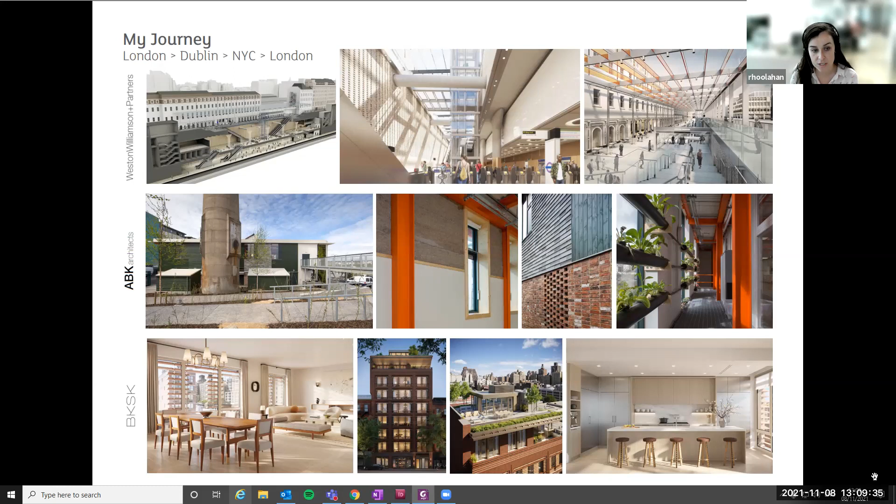And after my master's, I worked with ABK on this beautiful little project out in Ballymun, amongst others, but this one really made a lasting impression on me and looked at really how we can use buildings as an exemplar for sustainability. And with that experience, I moved to New York for a year there working with BKSK Architects. So I was primarily working on a luxury residential scheme, which the images are along the bottom, but actually it was trying to pursue passive house certification, which at the time was incredibly challenging with the luxury resi marketplace.

So why am I here today? Well, as a practice, our sustainability manifesto is that we believe good design is inherently sustainable and should influence every decision in the design process at every level and scale, because successful sustainability is a sum of all parts. What that really means in practice is we are questioning it at every stage of the process.

We haven't always been this rigorous. In 2018, we probably were about the same as everybody else, doing our best, but not doing anything particularly innovative. Our thinking started to change in the early parts of 2019, particularly when Architects Declare came out. And we started thinking long and hard about the work we've been doing, and we felt like we've been doing the right thing, but we're primarily relying on our instinct, reuse as much as we can, wherever we can. And we wanted to start putting data to back up that.

So we started looking at carrying out whole life carbon assessments to understand the carbon impacts of our buildings in-house, and the work has really accelerated from there. And actually, from our research side, 2020 was an incredibly positive year because work slowed down. Instead of using the furlough scheme, the company was in the fortunate position of being able to invest in internal research, and I led our sustainability pieces that are now carrying forward.

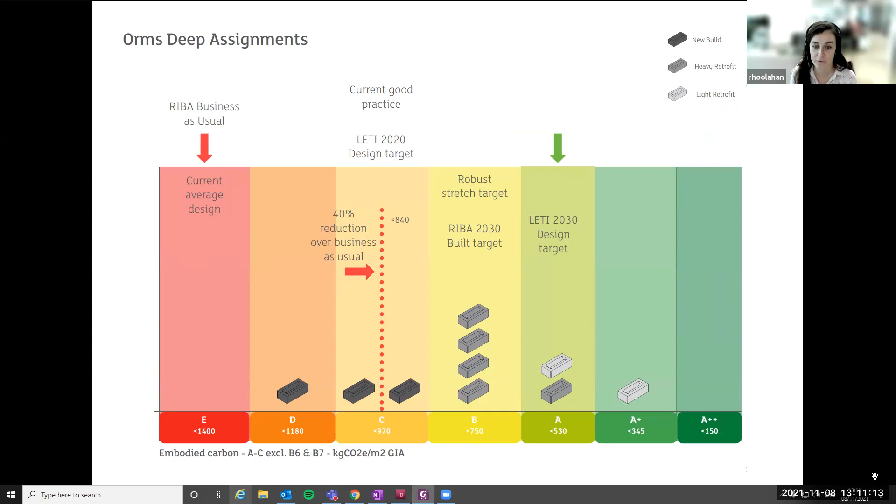So we do a lot of deep assignments. So we look in depth at the data surrounding our projects now. And some of you might recognize this as LETI, a research group over here, looking at how we rate buildings in terms of embodied carbon impact. So a lot of our projects, although they were completed by 2020, were already meeting the best practice targets. And we're taking some of that knowledge and trying to share it across the industry.

So the practice is supporting the UK Green Building Council's circular economy programme this year. And one of those pieces of work is looking at how we can reduce whole life carbon impact by incorporating circular economy. And I'm on the task group for that. So when the report comes out at the end of the year, I will share it. But the main piece of research I would like to share with you is about material passports.

So last year we worked with one of our clients on a design project. The client is the Grosvenor estate. Over here, the royal family hold a lot of estates, as do some of the historic lords, and Grosvenor estate is one of those. So they own huge swaths of city and the UK. Grosvenor have a huge portfolio. They basically own the majority of Mayfair in central London.

And they're very unique clients to work for because they really believe they're custodians. So they need to take care of this property for future generations. And it's a really interesting mindset to be coming at this with. So when we were doing our design project, although they had a very robust sustainability framework in place, they were very keen to understand what more can we do. And this question led to a separate piece of research being set up for 5 months. And we looked at how we could accelerate material reuse.

So our project was looking at 5 buildings in central London and what could we do better? And we thought we should be reusing materials. So this was one of 4 work streams, and I am going to go really quickly through this, but essentially, we believe that the circular economy is a necessity and not a choice. And what we were aiming to do with this work was increase material reuse within existing buildings.

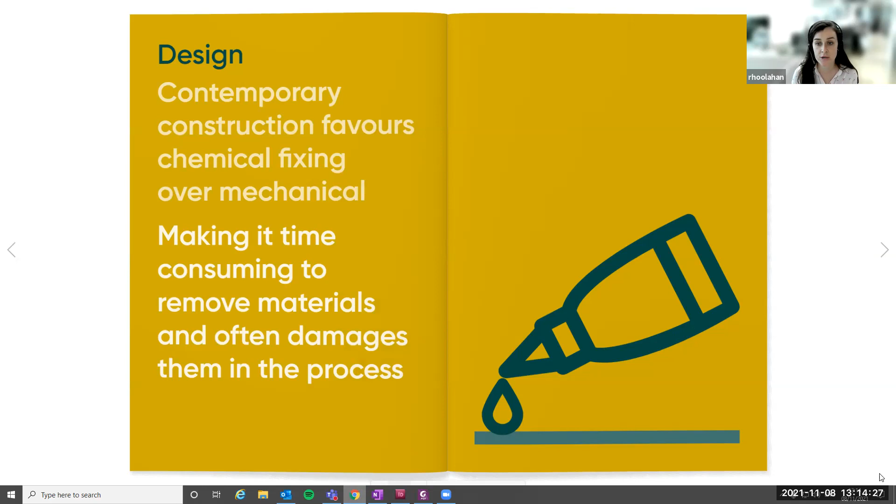So sounds like a great idea. Why are we not doing it yet? Well, the first thing is the cost of it. So it's typically cheaper to demolish and buy new rather than deconstruct and refurbish. We've also, for the past probably 50 years, been favouring chemical fixing over mechanical fixing. So when we're putting materials into buildings, we're gluing them together. So it makes them very time consuming to remove the materials, but also it damages them in the process, so they're not reusable. And then the last and probably the biggest barrier is risk.

So there's a lack of knowledge about the material that's already in the existing building, and therefore we have a lack of confidence in it. So how can we trust that the material is going to perform as we need it to? This is where material passports come in. So the idea of waste being a material without an identity is really, really important to grasp for the purpose of material passports. So the aim of the passport is it gives the material an identity, and then that knowledge about the material can give us confidence in it and enable the successful reuse.

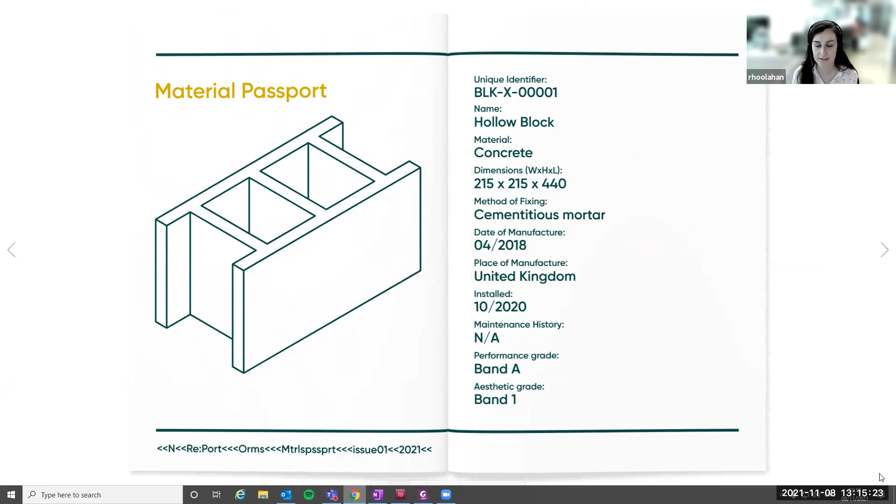So like my passport contains key information about me and where I've been, so does a material passport, largely around the condition and the original specification of the material. So this is our vision. So if you have a concrete block, you might have some key info. So the first one is having a unique identifier, so you're able to find it again. And then you're trying to capture some information that you may know from the original manufacturer, or you might be able to take a guess at.

And we looked at ways of doing this. There was research in place for new buildings. There was research in place that relied on manufacturers to produce the data, therefore, again, aiming at new materials. But what we were trying to do was deal with existing buildings and unlock existing materials. So what we've done is build a materials database for a project. And the idea is that you take your existing building to be redeveloped, you view it as a materials bank today, you have to go through a material identification process.

So these could be surveys. So at each stage of the deconstruction process, you might be surveying materials, you might take some away for testing, and you're capturing all of that data in the materials database. And over time, this will grow and grow. And the user interface is the material passport, and I'll show you what I mean by that in a bit. So I have a couple of references into other research pieces that have been carried out that are really good. And this page is just explaining how, at the start you might not know a whole lot, but if you can link it into your design process, into your 3D models, which we use all the time, then maybe over time the material database can grow as this project evolves.

And we have provided some ways for people to implement this. So this was meant to be an open source piece. It was meant to help the industry. So we tried to keep it as flexible and accessible as possible to all teams of all scales and sizes. And we have produced a number of tools to help people get started. So project teams contact me and I come in and give a presentation to them and help them get this started. And the idea is that as an industry, we can develop this thinking a little bit more, because as a practice, we don't have all the skill sets we would need.

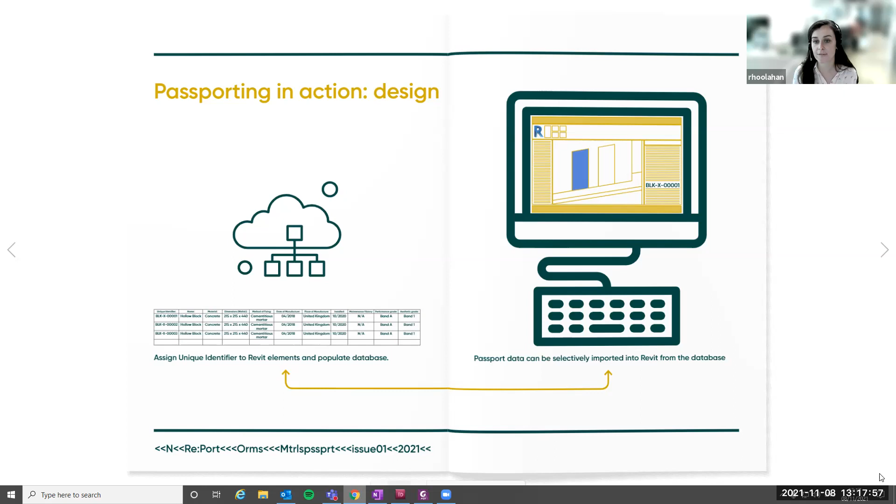And how I use it during the design process is, if I'm putting in a door, for example, I'm putting in my approximate opening size, and I'm looking to my database to see if I would have any doors that would suit that. And if I do, I can tag it, and then the information gets transferred across to that door. So that's the thinking behind it.

And then when the building is built, you will be able to access that information again. So if you went up to a door, you went up to a block, you could scan a QR code using your phone, and it will display the information contained within the material.

And we've also identified loads of problems and loads of future opportunities that we're presenting out and saying, look, if anyone has any experience in this, we'd love to take a look at this. And it sort of plays on some of the challenges around the softwares that we use. So I hope maybe in the years to come, you might come across this work again and hopefully be able to develop it in some way.

And hand over to Aisling, I think. I'll jump back in. Okay, perfect. Yeah, Rachel, that was great. Thank you. 15 minutes, bang on. On the button. Well drilled. Oh, yeah, round of applause from Gary. Thanks, Gary. Yeah, so Rachel, there's a lot there, and I certainly have questions. I'm sure other people will as well.

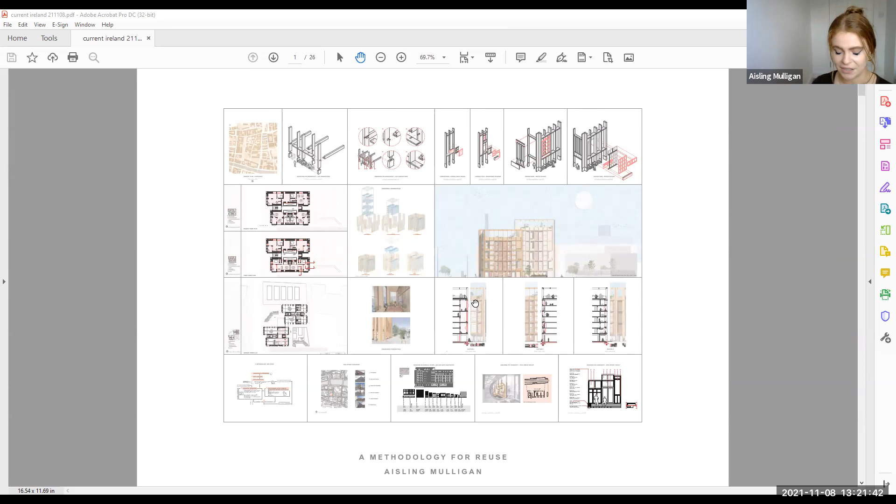So that was what I was thinking of, the discrepancies between having a very carbon heavy concrete building and that being deemed as net zero, as opposed to having a building that is low in embodied energy and being maybe fully net zero. So I started looking at different ways of building in a sustainable manner, using very low embodied energy materials or materials which have negative embodied carbon associated with their manufacture and use.

So I had a whole remit of different materials. And I started looking at how they compare with conventional methods of construction: concrete block, concrete, prefabricated concrete, all of those sorts of methodologies. So these are just two examples of different ends of the scale.

So one thing that was being talked about quite a bit at the time was mycelium, which is a substrate of the mushroom plant, and how that can be used to bind other substrates together, so woody substrates, to create different methods of construction. So that was just one out-there idea.

And then also dowel laminated timber, which became a key starting point to my ideas of sustainable design. Dowel laminated timber essentially takes the idea of mass timber construction further. It uses that idea that Rachel was talking about, where you're not using adhesives or glues to bind the timber together. Usually if you're using cross-lam, the different elements of timber are glued together. But in dowel laminated timber, you use hardwood dowels inside softwood, and they react together and are basically friction fit together, and they work really well.

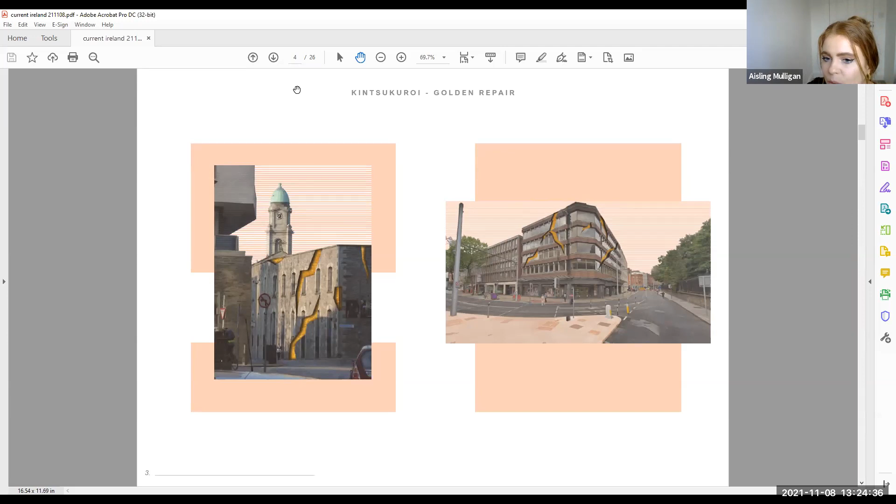So I wanted to think of an idea whereby this could start with the architect, and the architect could bring these ideas of using low embodied energy materials throughout their design process to create a building that could be thought of as net zero from the ground up. There's this idea in Japanese culture of golden repair. We have all of these elements in our cities, buildings as material banks, essentially. And if we decide to demolish these buildings, we're getting rid of all of these resources, whereas we could just supplement them with something new and those resources could be used again. So I started thinking of how you could bring this into a cyclical design process, starting with the architect.

So say you have a building that's going to be demolished. This building would be demolished hopefully in a manner where the elements are harvested, and those elements would be added into a local or regional inventory of materials. This would be the starting point for architects in their design process. If you're Dublin based, it could be a Leinster inventory of materials, something regional enough that transportation wouldn't contribute too much to the associated carbon. You would go to this inventory and choose the elements you could use within your design, and then those elements could be supplemented with low embodied energy materials.

So for the structure, harping back to dowel laminated timber or mass timber. And then hopefully you would design for disassembly, for adaptability and flexibility, to make sure the life of the building was as long as possible. But at the end of that building's useful life, it could be disassembled easily so that the process could start again. Those materials would be reintroduced into the inventory and architects could go on from there.

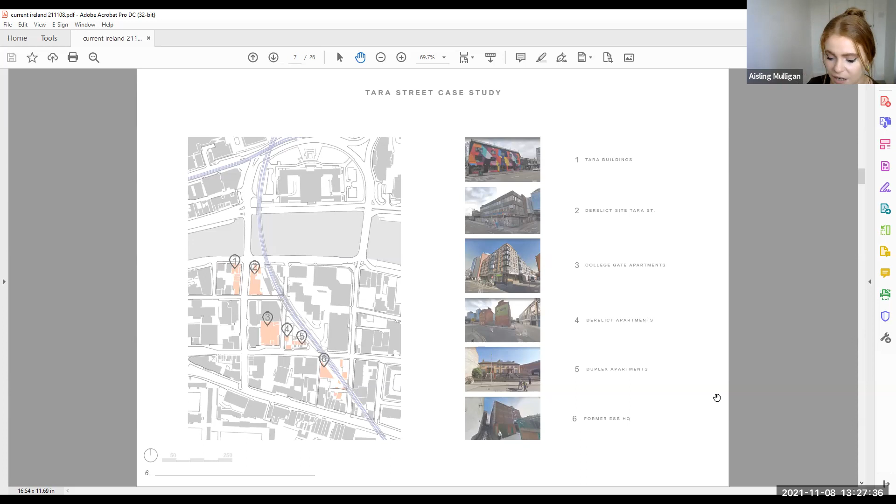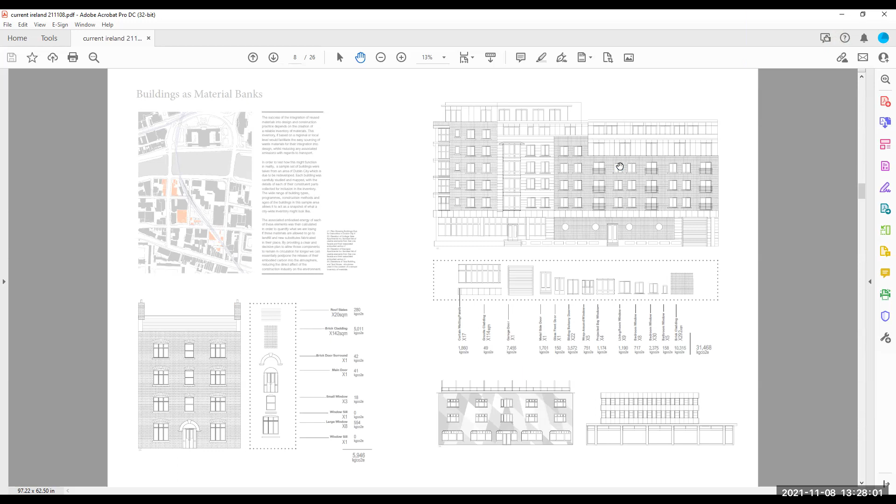So I zoned in on a specific area of Dublin, around Tara Street, where one of the main Metro North stations is going to be developed. At the time, there was quite a lot in the press and documentation about these buildings and how much demolition is going to occur in this area and what we're going to lose. It was quite a good variety of different types of construction and buildings from different eras. So I started to think of what is available to us in those buildings that we could reuse if they were to be demolished in a certain fashion. I started breaking down the buildings by their facade elements and calculating the associated embodied energy with each of those elements to see what we would lose.

And that was then broken down and categorized. So I ended up with this inventory of materials, so I had one of these elements for each building, and it's just a visual representation of what we're going to lose if these buildings are demolished in the usual fashion. And it's shocking to see everything that will go to waste, even down to doors and timber elements and windows, things that could easily be reused, and in some of the cases were very new to begin with.

So I started questioning how we're dealing with those things at the moment and how the council is thinking about demolition. And at the time in the development plan, one of the main things that was being talked about was that buildings over a certain size had to have a material resource and management plan. But I noticed a discrepancy between this being the hopes for what could happen and actually the implementation of that in the city.

So I wanted to then continue on from the creation of this methodology to the creation of a sample inventory of materials, to then seeing how this could be implemented in design. So I wanted to design a building in as circular a way as possible using those elements. So I broke down what I'd been doing thus far into a manifesto of what I wanted to continue with. This came down to the reuse of materials and their supplementation with low embodied energy elements, and then designing for disassembly, so the layering of structural elements, which I'll get into a bit later on, and then designing for adaptability, flexibility, and using demountable elements.

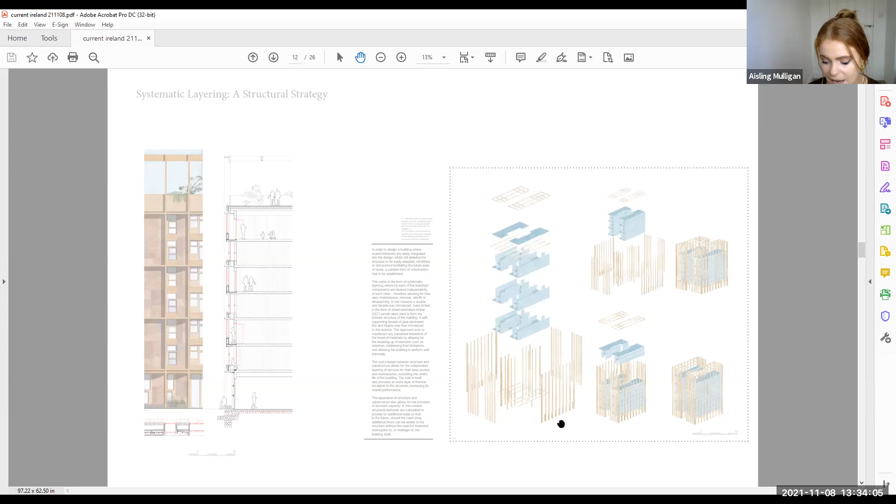So internally, the structure began to develop in a way that you end up with this duplicated external fabric, and the build-up changes depending on the orientation of that facade, so that it can deal with different levels of privacy, different levels of light and stuff like that. But it also means that all of the structure is pushed to the external perimeters of the layout, which means that internally the layout is very flexible.

So just for example, these structures kind of started out as duplex units. So if we were just to take this corner here, this would be the ground floor of a 2-bed duplex. And internally, all of the partitions are non-structural. So these can be moved around as the inhabitants see fit.

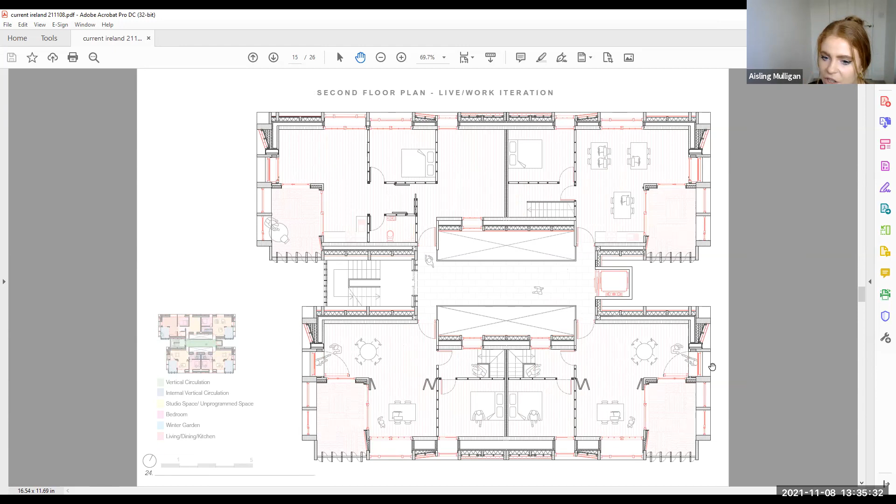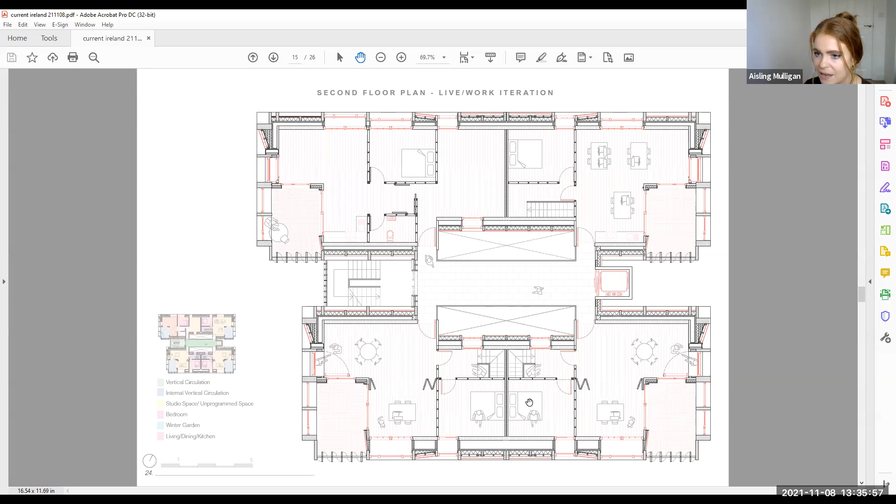But the main idea of adaptability in this was that each unit was designed as per the residential guidelines of the time, but also that each unit was given additional unprogrammed space, which could be used by the residents as a home office environment, but could also be changed to be used in whatever way they see fit. So it could be a granny flat, or it could be extra living space, an extra bedroom. It could be partitioned off from the main living area and sublet as well. So that was the idea of flexibility in the short term.

And then moving on, as you were saying about designing for disassembly and using non-chemical fixings. So I was thinking about how you would be able to design in a manner that mass timber elements could be fitted together in a way that meant that they could be easily reversible, and all of those elements could be taken down when the time came for the building to be demolished. So this was an idea of how that glulam structure might work, with the idea of trying to remove as much concrete out of the construction as possible.

So this was an idea of using stone footings for all of these mass timber elements rather than using concrete, and that these were then, as a visual representation of what was going on in the building, connected by gabions, which were then filled with demolition waste as a visual nod to the public of how the building might be constructed.

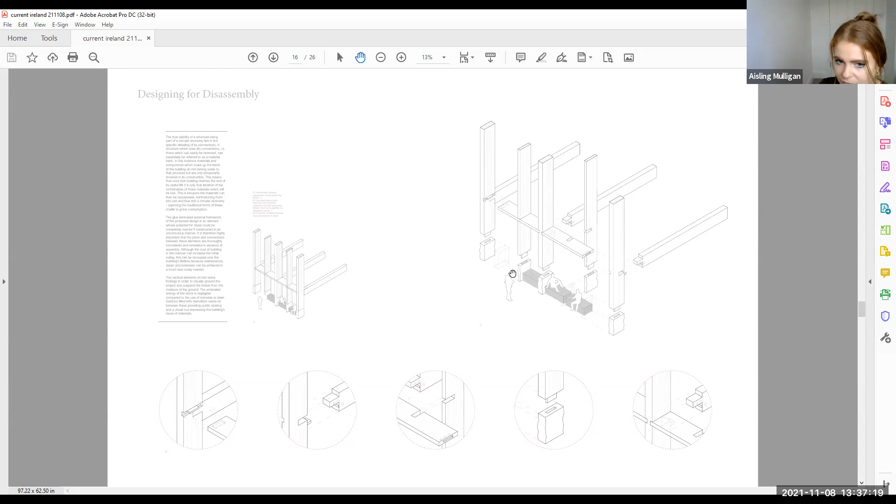So one of the main elements then that needed to be rectified was this idea of how do you incorporate reused elements into a structure whose fabric is newly manufactured. So how do you bring in glazing elements and attach those in a demountable way to a new structure?

So these are ideas of reusing brick panels that were cut from those other structures from the inventory of materials. So instead of trying to take out the bricks themselves and reuse those, the brick facade would be cut into meter by meter panels, and it would then be fixed to this timber cassette framework and then dowelled back to the external facade.

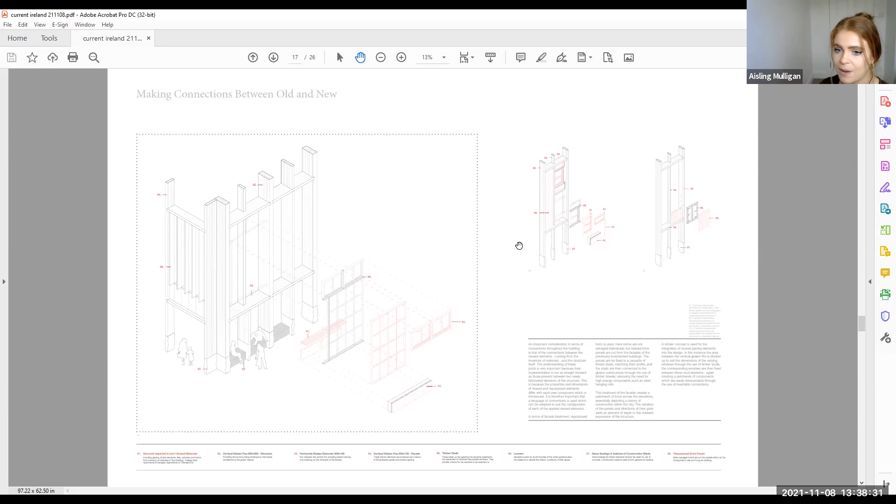And the same would occur when glazing needed to be incorporated. So between the structure, this would be broken down depending on the specific dimensions of the glazing elements that were being used, and they could be fixed in then as construction continued.

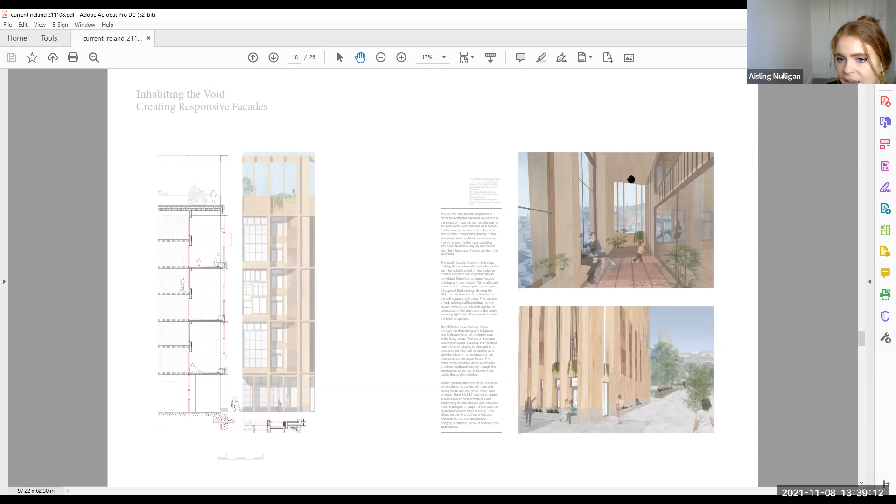So this is just this idea of inhabiting that void between the primary structure and the self-supporting facade, and how this could add to the space and deal with things in different ways. So in the normal construction, this fabric here would be as close to the external facade as possible, but in places this pulls back and creates a winter garden, and this changes depending on the orientation.

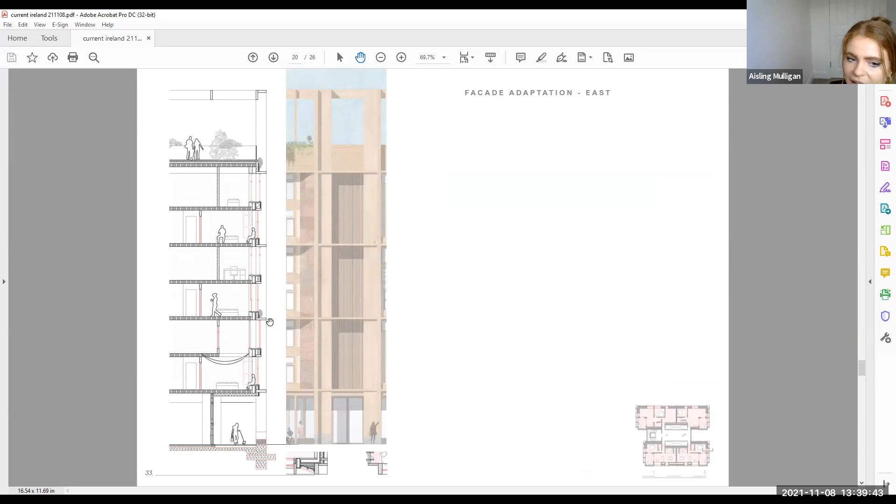So to the south you might have a Juliet balcony or a window seat, and stuff like that. To the east, this becomes narrower because you want the morning light into your bedrooms and into your workspaces. And this is a more private thoroughfare. So the horizontal elements create a visual barrier then as well, and then creating a winter garden.

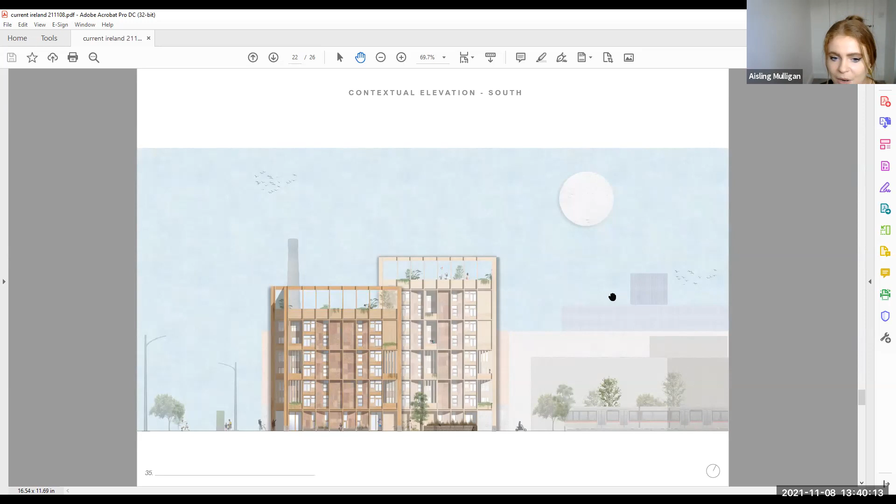So just to finish up, I wanted to look at one of the main things, I think, in the public realm anyway, which is what would this idea of reuse look like? And would it be terrible, basically? So I was thinking of how you end up with this patchwork of materials and how it might actually look nice. So those were a few things.

But then the main kind of element was the idea of cost. And I did a lot of research into that and how maybe at the beginning of this process, the costs might be slightly higher. But if you think about the maintenance of a building whose elements are very intertwined and difficult to take apart from each other, those costs cumulatively over the life of the building become very high. And this is kind of rectified by dealing with this at the start. So you end up with much lower costs.

And then just the last thing, the building that I designed, I went through and did a whole carbon analysis of how much embodied energy would be associated with it, and then at the same time did a concrete equivalent. So if I was to design that building in a normal manner, how we usually build at the moment, what that would be like in terms of its embodied energy and just the different elements and how they relate to each other. So it was like the end point to the thesis to say that maybe it would work. So yeah, and that was that.

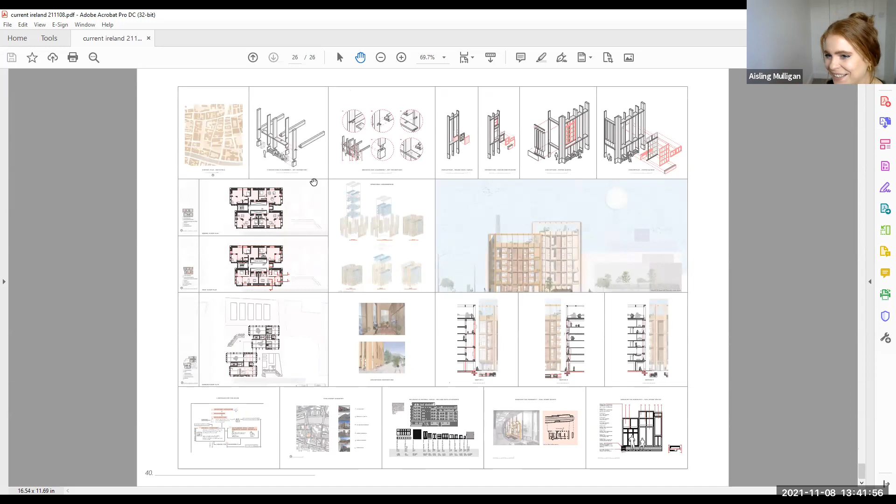Thank you, Aisling. Great to see that project again, and all its detail and resolution. I suppose there's a lot certainly of common ground, I think, between the two presentations and your approaches, and maybe a lot of questions that might come out of that. If people have questions or comments, you can either just pipe up or put something into the chat, and I can come to you, or I can just read it out from the chat, whatever way people want to go.

Aisling, I might just ask as an opening question, now you're working in practice and have been working in practice with Grafton's for the last while. Do you find that the thinking that you developed in that thesis, which covered many aspects actually, like demountable assembly, reuse, thinking about materials, to a certain extent the material passport idea, do you find that you're able to translate that into practice, let's say?

Oh, 100%. One of the projects that I'm working on at the moment is actually an adaptation of an existing building. I think it's one of the main elements of lots of projects at the moment, and it's very much being talked about. Definitely anything that I've come across, existing buildings, that's the way people want to go now, is to be adaptive reuse and reusing what we have. And the idea of the carbon life cycle of materials is really coming to the fore at the moment as well, and using less concrete and that sort of thing.